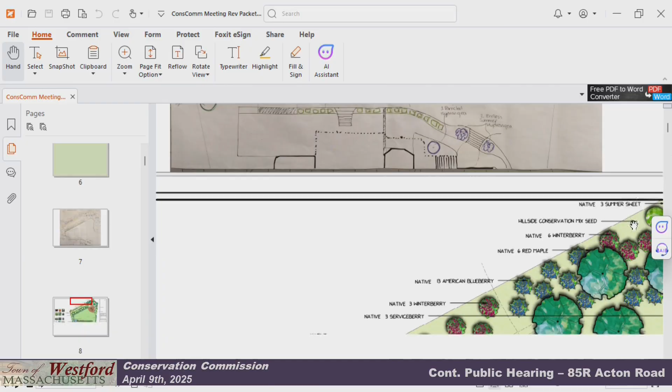Please note that these are not surveyor actual, but close approximates as measured with a grading tool used by our contractor for determining grades for building walls. Any exact measurements required by the Commission will need to be provided as part of the upcoming as-built by Hancock Associates, who we've been working closely with all along on this project.

So from a grading perspective, this augments our latest notice of intent document, which was submitted to the Commission on September 11th, 2023. The illustration depicts the notable revisions to that plan due to adjustments made in the field during construction, the resulting anticipated grade adjustments and improvements and transitions with neighboring properties. So of that, I'd like to call out just a few key things. There's a laser pointer under your map that you can use if you want to. So.

Thank you. I'll call out the first one. It has no real material impact on the grades, but we did make a revision to the small wall up here. The next item I'd like to call out are the rock and boulder walls, retainments on both sides of the large wall. So just to refresh, this is the large wall running around the back of the property, retaining for the backyard there. So there was basically retainment made on the left-hand side, and two small ones on the right-hand side. I'll start on the right-hand side.

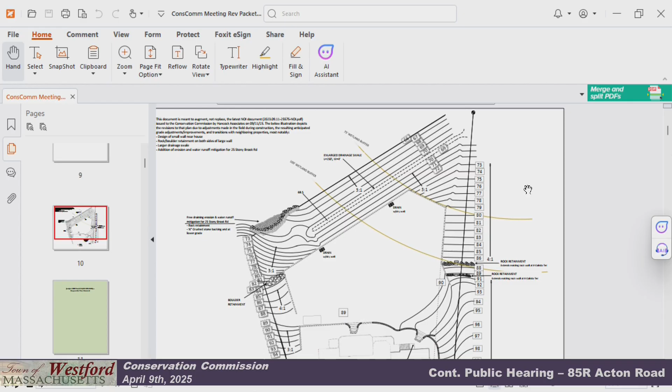So all these are done already? Yes, sir. This is after the fact, just showing us then. Yeah, we're getting close to as-built. It does not deviate so far from the original plan. I don't know if you want to try to flip them back and forth. I do have the original. I didn't include it in the meeting packet because I was afraid we were going to get too many plans and confusion.

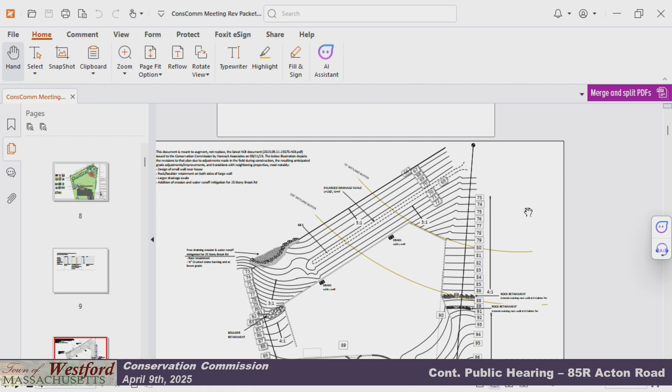But yeah, so the original plan showed 3-to-1 slopes in most places. So the improvement to 4-to-1, in my opinion, is certainly an improvement, slowing down the velocity of any precipitation towards the wetland resource area, to the top right of the plan. And when I was recently out within the last 2 weeks, the site is stable, and I think they're getting to establishing permanent ground cover, which is the next piece. I do have a printout of the original or the last NOI if anybody's interested. I know that's not as easy to display.

So what is the ground cover on these 4-to-1 slopes? It was originally proposed as the erosion control seed mix, which is just natural grasses. They reached out because the original planting plan was aggressive, and certainly the cost of all the plantings. They wanted to scale back a little bit, particularly with some of the plantings within the buffer.

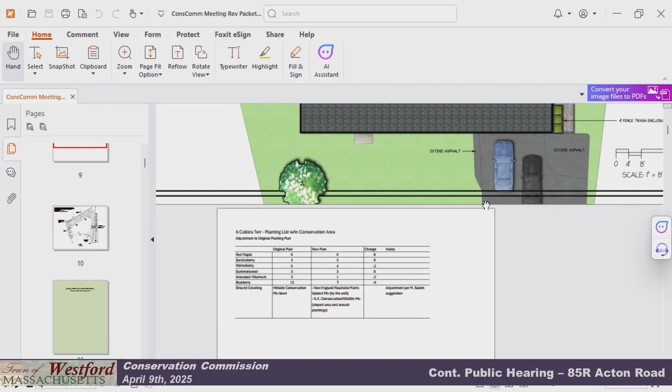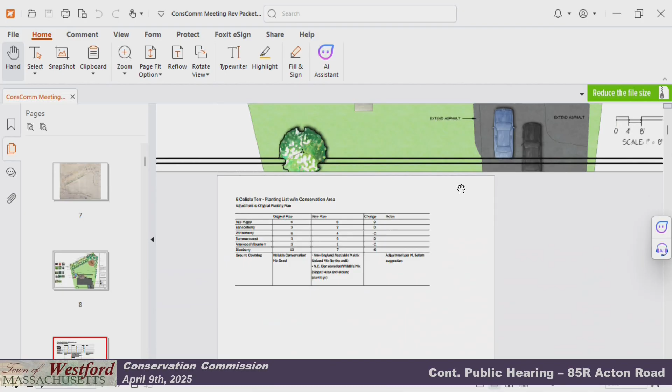So included was the original landscape architect's plan. The homeowners provided a hand-drawn, scaled back one. And then this afternoon, the adjustment from the original planting plan was documented. Within the buffer to the wetland resource, it's a reduction of 2 winterberries, 2 arrowwoods, and 6 blueberries. Sorry, I would note, one of those arrowwoods is right on the cusp. Our landscape architect was very ambitious in what he thought we could fit back there, and we walked it out several weeks ago. One arrowwood would be right on the cusp of the 100-foot buffer, so you may get only a -1 there.

In evaluating the existing conditions, as they are getting to permanent stabilization, my thought was to improve the seed mix, as opposed to just the native grasses, to both the conservation and wildlife mix, which has forbs and wildflowers, and the roadside matrix, which will introduce the more shrubby seeds, especially where the rear of the property isn't going to be maintained. The plantings are to be established and then left to naturalize, particularly within the 100-foot buffer. I thought the combination of those two seed mixes would enhance and diversify the plant community within the buffer beyond just the native grasses.

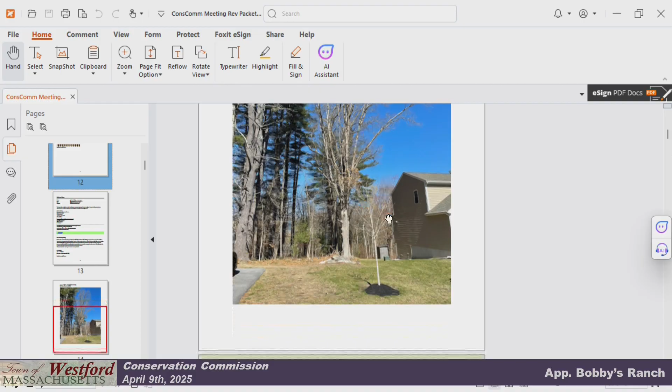The abutting property to the left, so looking at a photo that I took today, the property owner's house is on the right. There is a stone wall present that delineates the property boundary. They came in requesting permission to remove two trees. The first tree in the foreground, I think it's a maple, you can see the trunk here, is on the property owner's side of the stone wall. And so, in my opinion, that's their property, there aren't any jurisdictional wetland resource areas present, it's just two property owners.

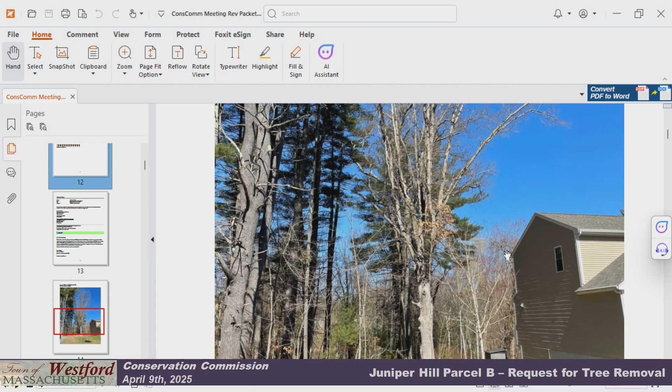In the background, probably another 30 feet or so beyond, kind of in the shadows, if I can zoom in, is another, I think, maple that is on the commission's property's side of the stone wall, but does overhang, and its canopy overhangs the property of 2 Juniper. I wasn't able to determine the status of the tree's health.

Again, they're concerned about trees and branches, and just to the left of where this photo was taken, included in the commission's last packet, a couple pines blew down in the windstorms a month ago or so. And so they were concerned about the trees and the proximity to the house. Just trimmed? I don't know. And I don't know if they've spoken with a tree company.

Typically, with trees overhanging property lines, the verticality of the property line extends up. So if they want to prune or trim the tree to the property line, I think it's within their property. Anything further than that, we would certainly need to hire an arborist, to have a professional out to assess the tree. Again, it is a hardwood, but it's sandy soils in that area, and I would defer to a professional arborist's opinion.

Yeah, I would hate to have to take it unless we really needed to, because it is a hardwood. And at least from what I'm seeing right here, while a portion of it may be crossing over the line, I don't see it hanging over the house. Right, it's certainly not going to cause damage, growing sideways. It certainly does appear to have a full crown.

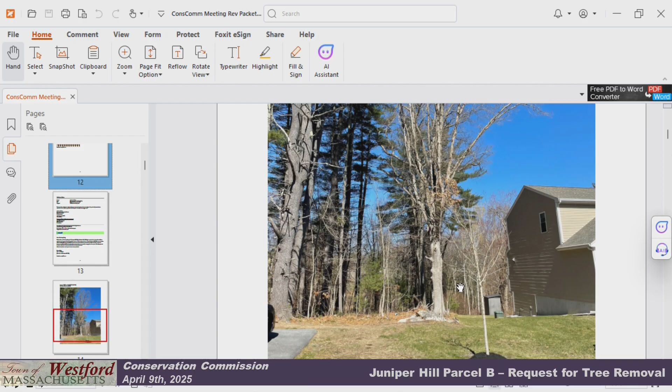And so, based off of the commission's discussion, I can progress with that. And in the event we need to have an arborist and the tree needs to be fully removed, we can. But make them aware what they can do without permission. Yes, what they can do that doesn't require the commission's approval. Yes. Okay.

Jim? This is no wetland involvement at all, it's strictly property line. It's property line, yep. There is a wetland, but it's further to the north, on the other side of the emergency access road. This wasn't part of it. Okay. Moving on to our 7:10 PM agenda item, there's a continued public hearing for 85R Acton Road.

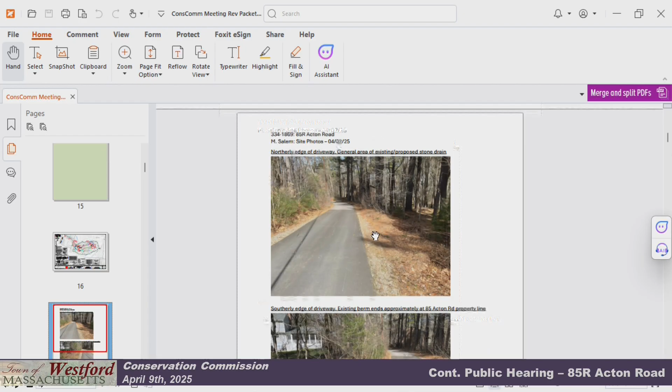If we could just paint, I have a photo showing the area. The area on the right here is the approximate location of where the stone trench would go if one was installed, and maintained as currently.

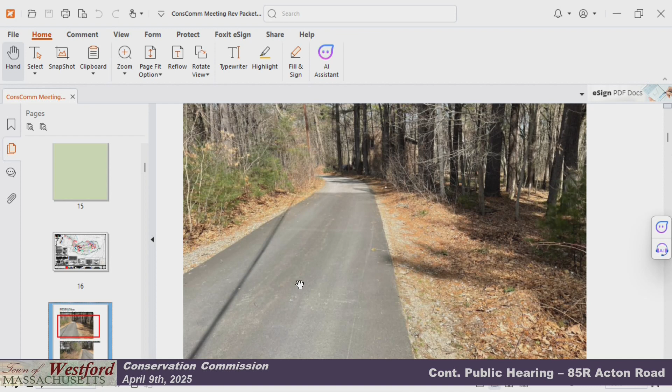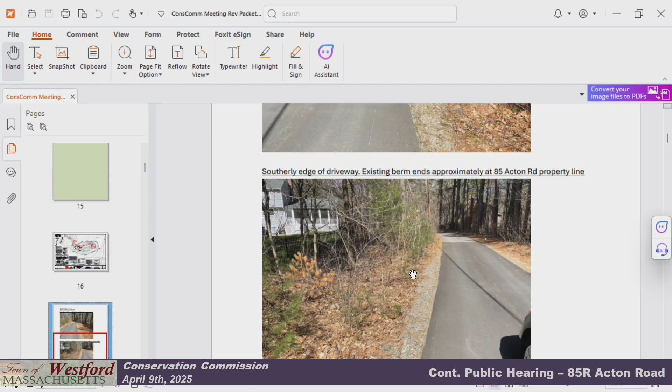Looking back up the driveway towards Acton Road, it appears that when the driveway was constructed, it was cut into the existing grade. So there's a naturally occurring berm on the north side of the driveway presently, and one also exists on the south side in this general location, continuing on through here, and there's a low point generally located at this dip in the driveway and natural existing contours.

A thought I had, and would appreciate the commission's consideration: could the natural existing berms along both sides be established, or could a natural earthen berm be established in that location to prevent issues? Basically, extend what's farther up the driveway to build up a berm so there's continued directing of the water into the pavement, so it doesn't come off onto the low point.

Something for the commission to consider - I have the photos. I'd be open to that, because I don't disagree. There's definitely a natural low spot here, so there'll be a confluence point, and it would migrate off, but we could certainly build that edge up. That's not a problem.

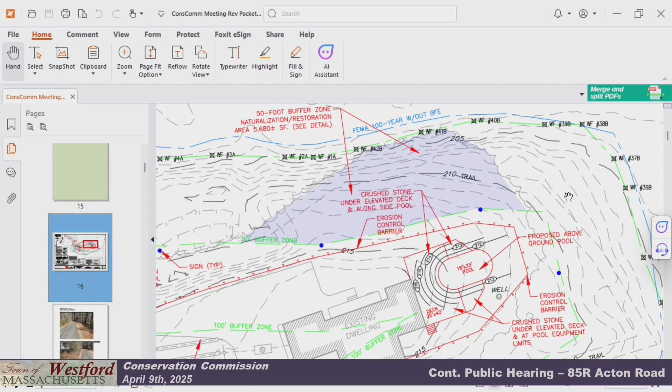Would those signposts be specifically called out in the order? Yeah, the signage isn't included on the plan, but the plan notes do say it. I can scroll to it. It's number 2: protective zone shall be identified by installing 4x4 posts with appropriate signage identifying protected wetlands are located down gradient.

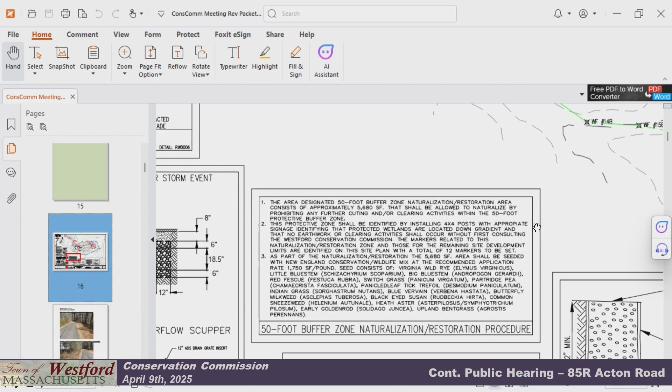Condition 53, yes, there is language for the signs: wetland resource area, do not disturb. It's pretty standard.

But I was also looking, because that condition is in perpetuity, so even when the certificate of completion is issued, that's one of the conditions that stays and would be found when somebody in the future, like a homeowner selling, goes back to the registry of deeds looking at stuff. They'll see those conditions persist.

So that really represents everything that was submitted to you to be prepared for this evening's discussion. And then, as I said, what we received was a letter from the abutter's consultant today, and I did my best to try to get that addressed and get the plan revised so we could try to be on the same page. We're not going to be on the same page with all items, but we were just trying to do our best to make it easier to hopefully close this matter out this evening.

Unfortunately, the way the consultant addressed this, they didn't put numbered items, it was more narrative form with some bullets. What I did was take the opportunity to actually number some of these, so we'd be able to come back to it if we had to at a future date. So if you'll allow me, rather than summarize their letter, I'll summarize my points, and if we could have the plan, or I can just read the points and then go to the plan. I'm not sure what's easier.

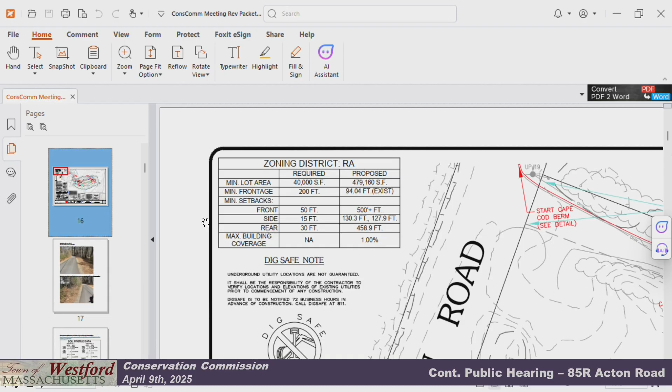So Matt, is this the area where you talked about bringing in additional earthen berm? Yeah, to recreate kind of the earthen berm that's on both the north and south of the driveways. Because in viewing it in the field and also, again, going back to the first revision, this contour, 1 foot contours, Peter? Yeah, it should be. So this is the 209 contour that shows that exact condition.

So again, my proposal, as opposed to putting a Cape Cod berm as per the common driveway plan, or as what was originally proposed, focusing the effort on this stretch between contour 211 on the south side, back up, so that there is no longer this 209 dip that does enter onto your property. And again, don't know whether that was a naturally occurring condition or if that was something that occurred when construction of the house originally did.

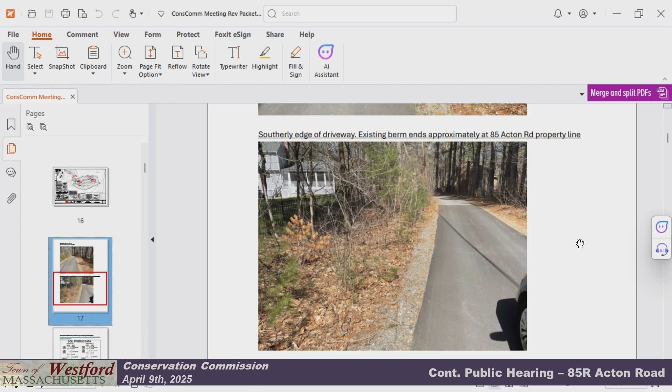But my thought, and again, back to the photos, and kind of this dip, as you've discussed, you can see the slope go down, and this is that section of elevation 210, 209, that does extend onto the back of the property at 85 Acton Road.

So my concern is, I know Mr. Timlin asked about this, and I get his point. He's worried about his septic tank. He asked about this at the last meeting. He lives at 87, that you can see off there in the top left. He's concerned that if there's too much water there, it's gonna go over onto his side and cause issues with his septic tank. I get it. But if that all of a sudden becomes a concrete barrier that goes the entire length, and I don't recall if it was that way before, that water is once again going to redirect potentially over to my side.

So I think, Matt, what you're talking about is here at the edge of the vegetation, there would be a berm. So the 209 elevation on the 85 Acton Road property, that grade there would stay, but there would be a berm raised up so that water would no longer flow in that direction. It would. So it would stay in the driveway. Yes, it would stay on the driveway and get to, again, this stone infiltration trench. And you may have to readjust the location from the original location shown here.

If I could just bring up one thing though. I'm certainly fine in doing this to protect the abutter here. I'm in 100% agreement of this. What I don't want to do though is then isolate this, because I've raised this up so whatever precipitation does fall in and does not infiltrate on its own, it will not have an outlet. So I'd be creating this captured zone. So in order to really do this, you'd be going back and filling all this in.

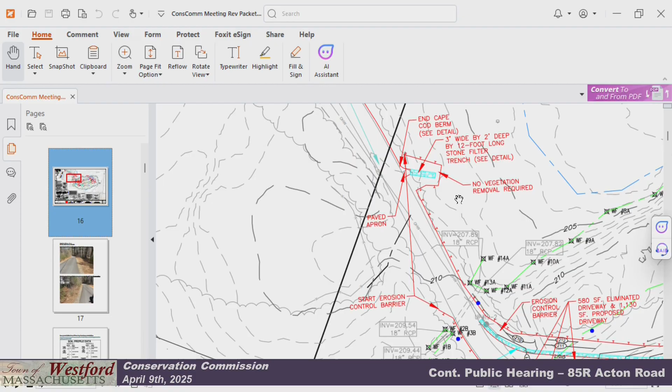So I would definitely do that, and we'll just move this down. There's no reason why it has to be here. And honestly, if we were in agreement to not do this whole berm here, I'm not even sure we really need this, because the reason for this was only because we were creating concentrated flow here.

If we're not gonna put that physical berm in along this edge and we let the water just bleed out as it naturally would off the pavement edge, because there's no evidence of it being a problem, then we wouldn't need this at all. And we could just take care of this problem here. So I'll leave that to you folks.

But to this gentleman's point, I have no problem blocking this off, but when we do so, we will put a pipe in. It doesn't have to be anything big, probably like a couple of 6-inch to 8-inch pipes, just a means for the water to exit. Just to have the ability to leave, because if surface water doesn't infiltrate, it's gotta have a place to go.

Is there a natural break that could be done for that instead? No, because if you're gonna stop the water from going this way, then you don't berm this up. You know what I mean? So we could just do the pipe here too, that would be the other option, just create a low spot here. In other words, acknowledge it's coming here, capture it here and bring it across. Well, I'll leave my engineer to get feedback on this anyways.

The other question I had was, last time, Mr. Gozo, you brought up that you wanted to see the infiltration rate on those. Not the rate, I wanted a confirmation of what they told us, that it was a 25-year storm. Okay, is this sufficient, or is there something above and beyond that you're looking for? At the top there, it's actually 50-year. I don't know if that's because the number was incorrect or because the barn was shrunk.

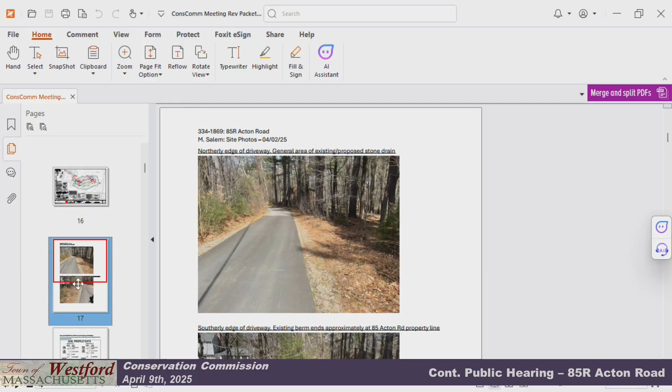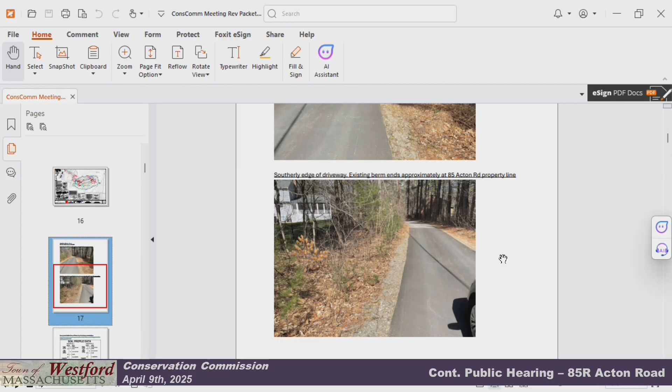Hi, my name is Kristen LeBrie, I'm from Howard Stein Hudson. Going back to the berm, the recommended pipe just creates a maintenance issue. That'll get clogged. It will end up isolating it anyway. If you can do almost like an emergency weir on a pond. Do you want to try the laser pointer? Show us what you want.

So kind of what it's at, but if you create the berm and then cut almost like an emergency weir into it, that way the water from here can escape still at that 209, because the 208 is on the other side of the driveway. Creating a natural cut, almost like what it is, but cleaning it up, creating the path across the driveway, and then shifted down here, it would make a little bit more sense based on the natural low point.

But putting a pipe there, because it's heavily wooded, it's gonna clog with leaves and just not work. Not gonna disagree. Yeah, we'll just pitch the asphalt at that level, we'll make a firm low spot. So whatever that contour is, we'll take the lowest point there and then just cut the driveway so it's lower.

It's all overhead services, so you don't have anything underground. You got a well, so you can cut the driveway, that's fine. So our other concern was not necessarily the proximity to the house, but the well is in the rear back here, so the water quality is a concern. Regarding the testing, we would like to see current testing, as if you provided for a new construction testing that was 25 years old, it wouldn't be accepted for a new build. That testing is out of date, and we'd like to see new testing for the groundwater level, as 25 years later, it may have risen up.

As for the grading, if you could kind of zoom into right in front of the garage. We do have questions regarding this grading. I know the elevation is set to 212.5, which would result in a 212.5 here. We have a 212 here that wraps outside but doesn't touch the driveway, and a 211 here. So there seems to be a grade missing in between here. The 212 would have to cross somewhere in order to get from 212.5 back down to 211,

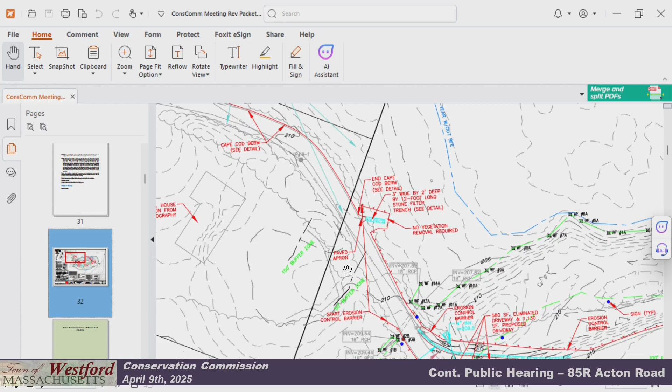So there are some revisions to the plan, specifically the removal of the Cape Cod berm, whatever the design is. We're just gonna change the grade of the driveway. Right, that's really what it comes down to, to eliminate the low spot and create a new low spot, if you will, that will then take the water to the northeast. Right, so that's kind of a change. And then the relocation or rotation, shifting of the barn.

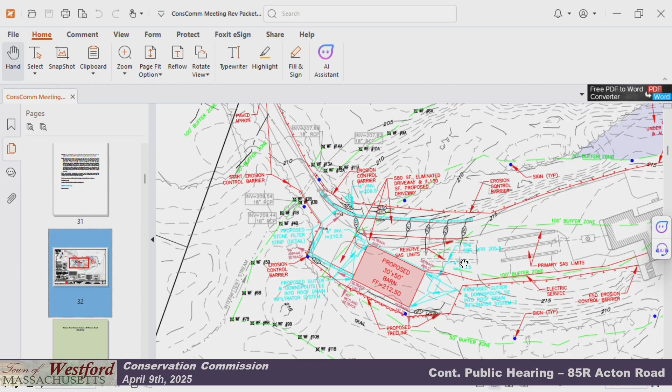I would like to verify with the Board of Health the applicant's representative's comment, just because I don't know enough about setbacks to reserve systems. If they conclude that we have to be 10 feet away, then we would have to be 10 feet away. I just don't see where they would do that because of what the regulations state. I defer to the Board of Health on those types of things. Yeah, I'm fine with getting something in writing from them. So we need to see an updated plan based on all the conversations we've had tonight.

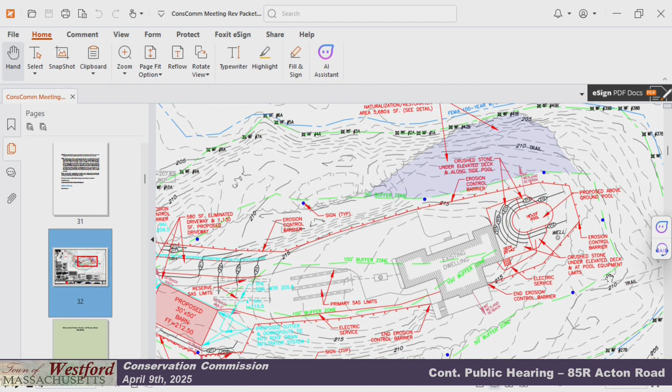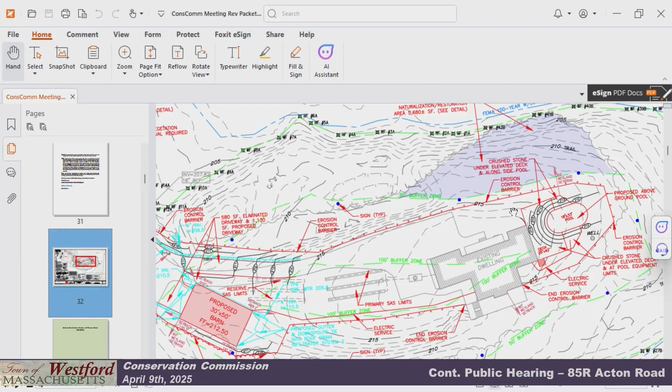Yes. And then some relocation of the signs, at the corners of the start, and then the one in between that. Right, exactly. So it looks like 3 additional signs? Yeah, or if you can reconfigure a couple so the distance is not as much, if they fall more naturally at 50 feet or something in that stretch. We'll work out something with you, that's fine. Yeah, certainly.

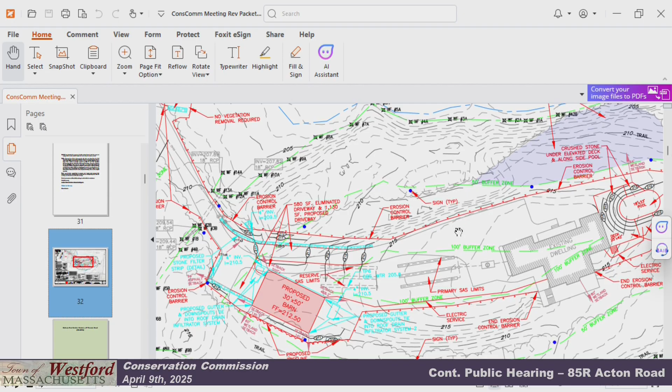And then I defer to the commission regarding the last set of comments, in terms of whether or not we'd want some HydroCAD confirmation. They did raise the point of the soil testing being from the original house. Typically, and again not apples to apples, the engineering department, when reviewing larger scale developments where access to a stormwater BMP feature would require the removal of trees, if the commission is amenable, could include a special condition that the soils be evaluated in the location of the 2 Cultec chambers as work is going on, so we're not digging new test pits just to confirm.

That would seem reasonable to me. So basically a confirmation report of the soil conditions and the groundwater level at the time that the infiltrators are installed? Or prior to work, when the barn's being built first. Right, as early on as possible, so if things need to move or we need to confer and make adjustments, the barn foundation isn't poured, but we have erosion controls in and can make those types of adjustments. That would be my recommendation specifically to that comment.

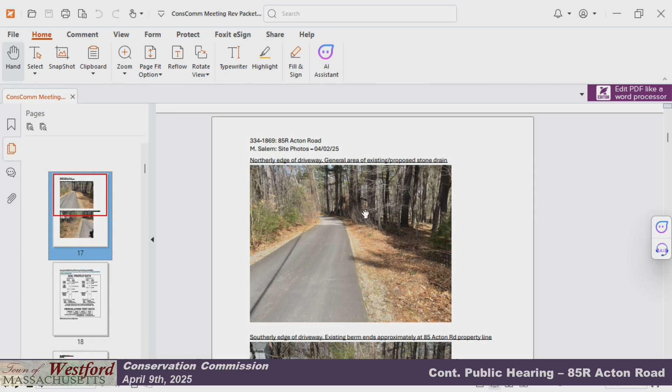But that's not what's happening in the field, Kristen. There's a natural berm there. There's a tree line. Yeah, actually, can we get the pictures on? So if the natural berm is the entire length, then I guess leave that to the northern neighbor. Zoom a little bit? The driveway's cut down. Yeah, you see kind of, again, here's kind of the grade. Get that out of the way.

So, 1 foot contours, you can't read it on a plan, I guess. In the field, I thought the existing grades of the vegetation, or the existing topography, is doing a better job than a Cape Cod berm. Because it does, and I know you talked about the 1 foot contours.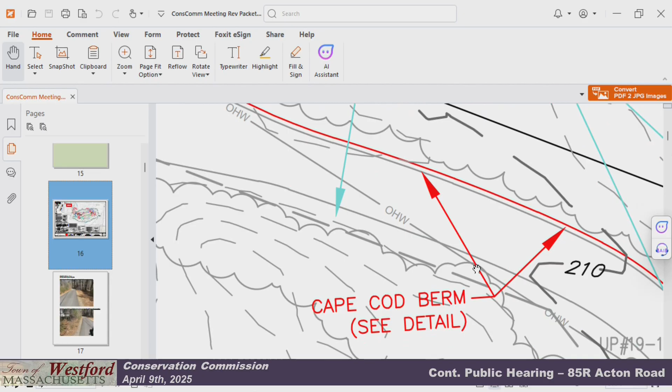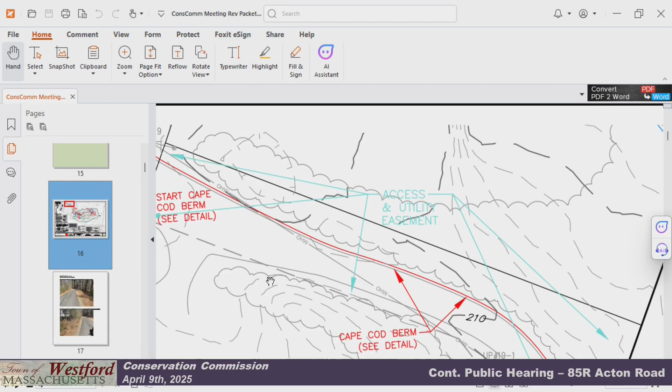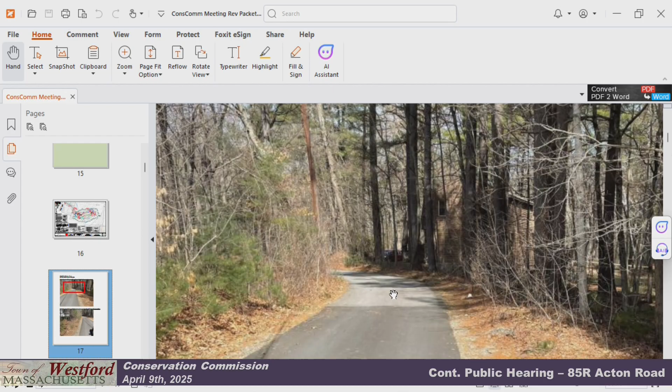So zooming into this, this is the high point of 210, and the berm does continue, it's not going directly because this is kind of the knoll that's shown. Remember, outside of work areas we're relying on LiDAR data, and that LiDAR is pretty good for what we get, but it's more regional based, not for micro analysis. So there's definitely a ridge there that you're just not going to see in the LiDAR analysis, unfortunately.

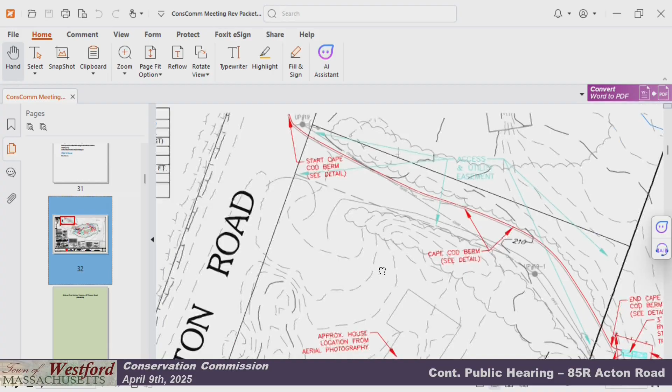The other thing to point out, if you go back to the map, what you don't see on the diagram is my driveway runs here. There is a turnaround that was designed right there, basically from an agreement when they built that easement. It's always been there since I've lived there, so that both homes can easily get out onto Acton Road facing straight.

The water tends to pool right there - sorry, I've had coffee so my hand's not that straight, but it really tends to pool there. I don't know if that changes your perspective on what you would do with that berm, or does it make sense to go on either side? But again, I wasn't the one who asked about this, it was Mr. Timlin.

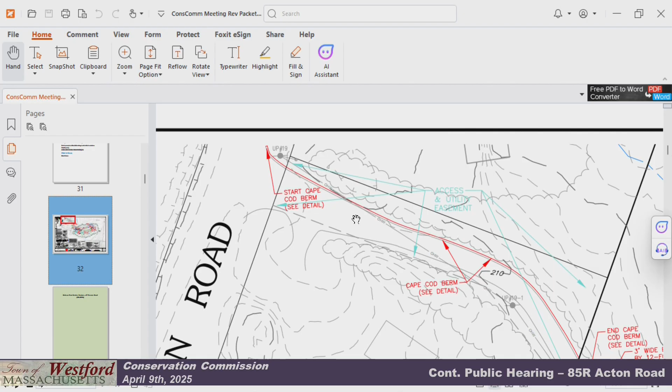Getting a bit far afield from the project site too. Yes, so about the area up near Acton Road and the nearest project - based on your original question, if there is a natural berm already there, we are comfortable with the Cape Cod berm coming out, given it does not affect things.

Well, the Cape Cod berm as I understand it is already gone, and the talk was, do we put it back? The proposed Cape Cod berm coming out - okay, sorry, yeah. If there is a natural berm along this entire section of the driveway, then we are comfortable with the commission's choice to have it removed from the plan, as long as there is a natural berm that entire course.

Based on your observation of the drainage on the existing driveway, the water is not going off in one spot, it's not scouring. The only location that I observed where there was a low point is this - that's the only place that water was going off, where water would pool and go off the driveway, affecting one of the abutting properties, not in a naturalized area.

I don't think that you need to do anything with the existing berm or whatever you want to call it on the 85 property. In 85R, there's some kind of a connection between the water and traps on the left and gets it to the right. Right, if the driveway is pitched the other way - and then that's addressed.

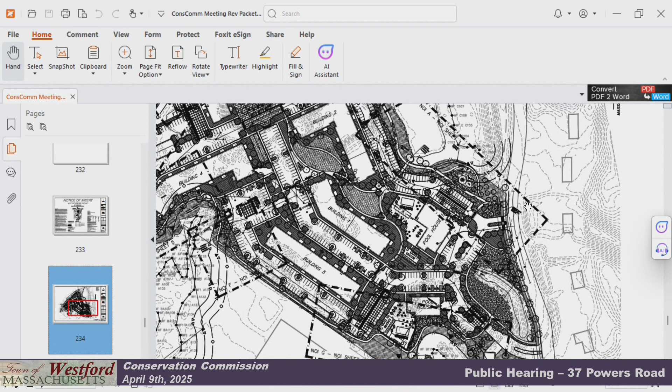There's also going to be a wastewater treatment facility on site to support the 530 units, with infrastructure located in the very central portion, not within any jurisdictional buffers. There are a number of leach fields shown on the plan, primarily in the green space, the central common area. There's going to be a small building up towards Powers Road, off the entrance, that will house the equipment for it. That will comply with state standards for wastewater, fully regulated by DEP. The design and science behind that development is ongoing right now, but that's our scheme for wastewater.

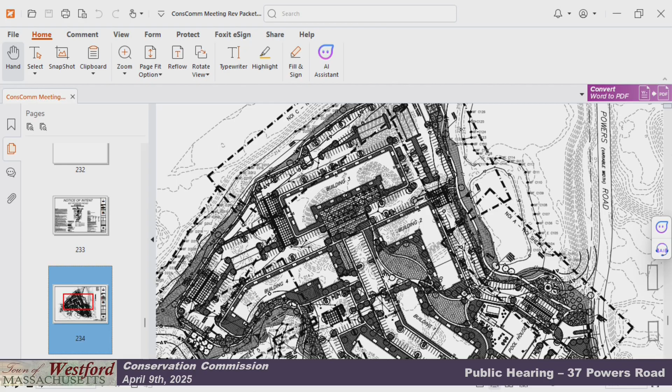For the buffer areas surrounding the site to the north, west, and south, what we've done is centralize the parking and buildings in the middle of the site, and as you work towards the edges, stop development and transition into more of a restoration and naturalization scheme. It's landscaping, but not intended to be manicured — it's intended to provide new soil that's not present there today, with seed mixes and native plantings to allow those areas to naturalize.

The caveat to that is we are proposing a public passive recreation piece to this project, revolving around a walking trail that surrounds the entire project. From Powers Road, northwest along the western property line, then towards the south, there's about 0.85 mile of walking trail. That's going to be a public amenity, part of our planning board process, and part of this project under the MBTA Communities Overlay.

Secondary to the walking trail and passive recreation, there are a couple of nature overlooks proposed. There's one nature overlook right here, overlooking the gravel pond in this area, and then to the south, another one in this corner that comes off of the walking trail. The walking trail goes around the entire perimeter of the project.

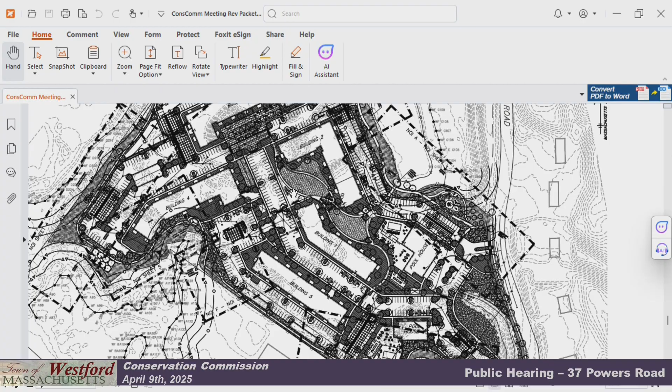The walking trail that goes from Powers Road up and along the northern side, this is actually going to be a multi-purpose path for bikers. It's going to be a little bit wider, 8 feet wide. We're proposing pervious asphalt on that, and that is going to be maintained year-round. That is the only piece that has pavement associated with it. It is pervious pavement, and it will be maintained. Essentially, that gets people from Powers up into Bell Westford and then up into 110, creating pedestrian connectivity through our site and then through adjacent sites to get up to the sidewalks on 110.

There is a small fitness area that's here, but that is... Yeah, we can go to the plans. We were just looking at the index sheet. We blew up kind of the site plan along the entire perimeter. So that multi-use path is right here. That's going to be the wider one.

This is going to be a small fitness station. This is your 50-foot buffer, 75, and then 100. So we're outside of that 50, but still inside jurisdictional. This is the nature overlook that I had mentioned earlier. That is within the 50. If you look at this small section here, part of the trail does cross into that.

I'll let Dave dive into the vegetation piece of this. But basically, to summarize, we're centering our development to be outside of jurisdictional areas as much as possible. We're then transitioning into a restoration and naturalization plan that has a passive recreation component to it. Dave, do you want to start talking about the restoration a little bit, what the seed mixes are, the different tiers that we have, which are all represented by the hatching on the plan?

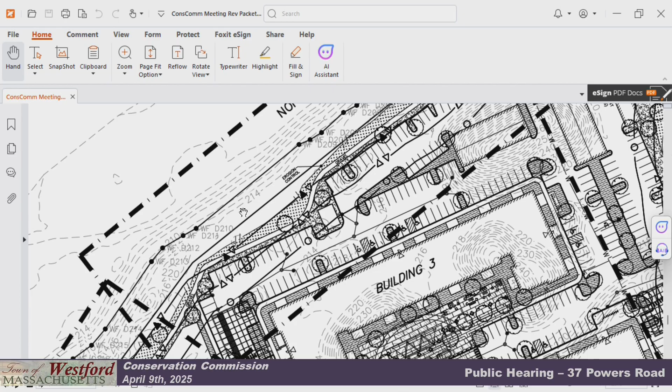Where we're working in the 50-foot and the 75-foot, there is an earthen berm at the edge of the gravel pit where they got to their property bound, which is full of, I don't want to say garbage, but it's all sort of mixed aggregate material that they've pushed over to one side. And the vegetation that is there is really ruderal, non-native, either invasive species or noxious weeds and non-desirable species.

So in that area, we have the ability to clear that vegetation out and remove some of the soil, because as you implied, this rhizomatous growth via root structure is prolific in Phragmites and some of these other species you mentioned, as well as seed stock. So we would be able to grade down, remove some of the soil structure, apply clean, organic, rich screened loam, and then apply the native seed mix blends and have a native planting schedule on top of it.

One other question. So there's going to be a lot of heavy equipment here, right? There is right now. Could it be stored outside the boundary? We wouldn't have an issue with that as a condition, because there's enough land area here outside of buffer that we could store those overnight, certainly.

I assume this is over an acre of land, and this will be subject to NPDES general permit. Sure. So for over an acre of land, any of these properties will have a stormwater pollution prevention plan. It will be subject to coverage under the NPDES construction general permit, which has provisions for monitoring erosion and sediment controls, stockpiling of material, parking of vehicles where you might have fuel leaks, and finding designated areas to keep them away from natural resource areas like wetlands. And the swimming pool, is that in the buffer zone?

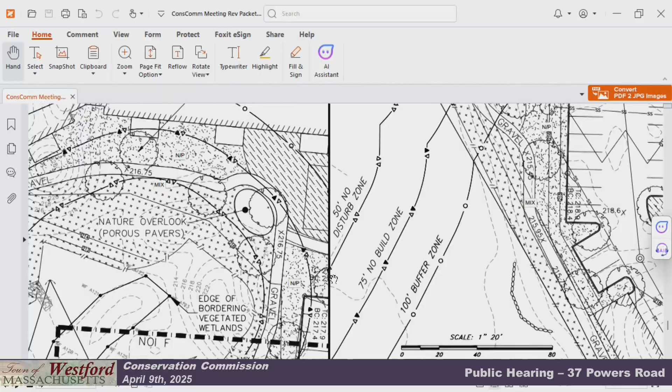So yes, we have two recreation areas, or two amenity houses. This first pool house is not within buffer zone, but if you look at the secondary, this is the 100-foot buffer right here, and the edge of the patio comes up to the 75. This pool? That rectangle is the pool, you can see the little pool chairs. So we've got the edge of the amenity space here, this is the 75-foot buffer, this is the 100-foot buffer, so we are nicking it a little bit.

Well, the concern is about chemicals. Discharge. Chemicals and stuff, where you store them has to be outside the buffer. Yeah, I don't think that would be an issue. Okay.

And discharge too, I mean, discharge, that's some kind of design pattern, whatever you guys do, right? Yeah, it would be depending on the type of pool that goes in there, but certainly that could be a condition, that they don't discharge. I mean, we could discharge into our stormwater system, which would adequately treat it.

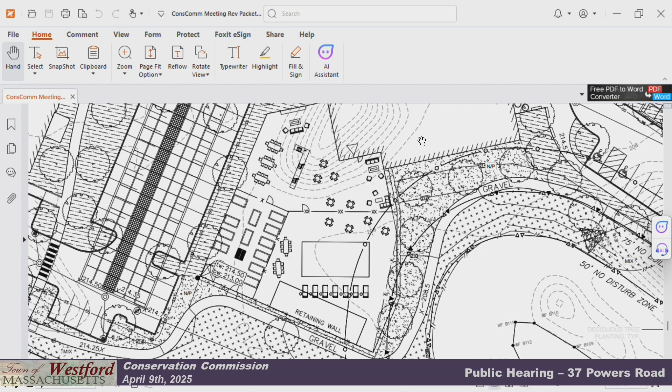So with this, where the hatching is the X's, that's the area to be maintained annually or mowed annually? So this is the restoration mix, this is the naturalized mix. Dave, would we be mowing this annually or letting that go, and then this would be mowed annually? Well, where I'm going with my question is when the erosion controls come out, right, if the X areas are going to be mowed annually, what provides the guidance for the maintenance crew to know where they stop mowing?

Got it. Oh, so at the edge of, okay, yep, understood. Yeah, because the erosion control is great during construction. When it goes away, no, you're right. So let us put a little bit of thought into that. It's a good question. Posts or monuments, yeah, that's exactly what I'm thinking. And those actually might be a nice opportunity for a little informational placard as well, if they're by some unique vegetation. I jump at those opportunities.

I talk about restoration ecology because it's the thing I'm most passionate about. I didn't get my degrees in ecology to watch trees get knocked down, which is nice about a site like this because there are no trees to knock down. It's already flat earth. However, I take pride in this. And any opportunity to educate the public, whether it be before or after photographs in a placard that demonstrates this was in fact a gravel pit, and here, through tireless efforts, we've tried to make it this way. Please be kind to it. Things of that nature, yeah.

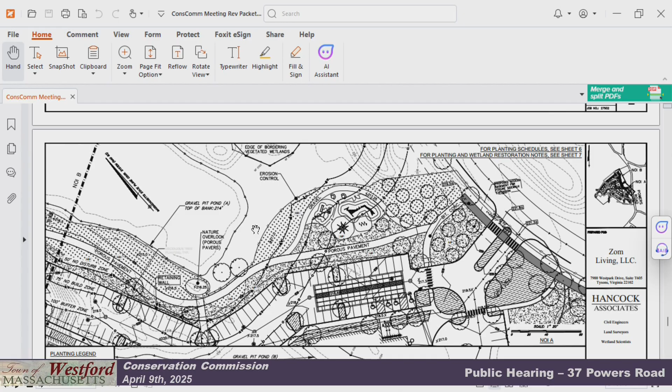Matt, can you, so when I was looking at the nature overlook there, right by that gravel pond, that looks like it's about 10 feet off the top of bank. Normally, if somebody was putting a residence near a pond, we wouldn't let them build a little patio area that goes to the resource area. I like the idea of natural overlooks, but our practice is we don't let people build an area that they could kind of sit there that close. Okay? And I'm assuming the commission would like to go on a site walk out here?

Yeah. Is that fair? So what we can do is we can certainly make that a topic of discussion as we walk around the specific area. To one, just look at the existing conditions and how it would be sited, should it be allowed in this location. And two, identify alternative locations for it. Something that we can still kind of get that view of the natural resource but further away, essentially. Right.

And one of the other points on the overlooks is, we understand that the Conservation Commission has standards, and how do you face the single-family homeowner who you just said no to and said, why did you let the development happen where we tend to prohibit those things? Again, I think in the context of just how degraded it is and how much work we're doing, with a site that will have usage of people in 350 units, these overlooks give people a designated spot to go and look. If you don't have those amenities available, that's when you tend to see illicit paths, where somebody cuts a path at the easiest point.

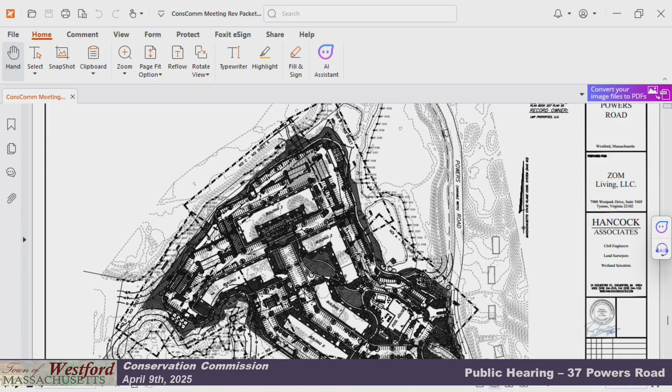My only comment was, you mentioned water connection to the Bell Westford to the north. Is that shown on the plan, or as that gets further developed, can that be? Yep, so it is shown on the plan, it's just tough to see, it's on the index sheet. If you zoom out a little bit, I'll show you. It comes in the main entrance, which is right here, comes down the main corridor, comes up. Oh, that's the W, water, okay, I thought that was the line of.

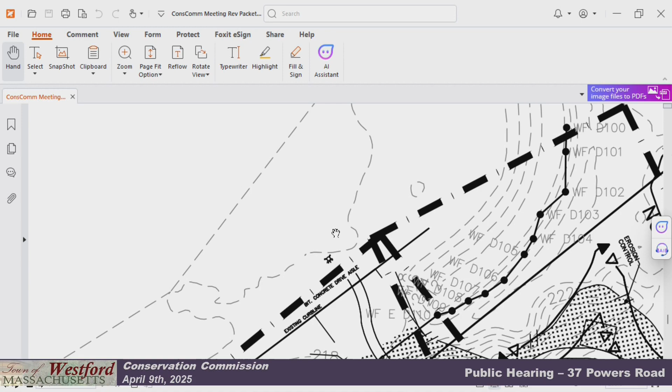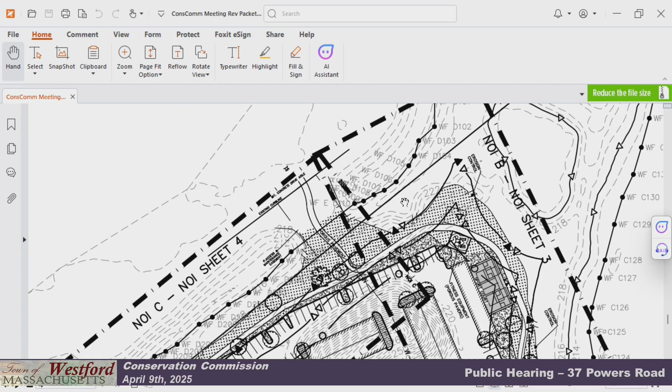Yeah, and then that's where the existing hydrant is for the drive aisle on Bell West. We're gonna end up connecting somewhere right in here. I don't know exactly where. The applicant has had discussions with the owners of Bell Westford, and they're supportive of that. The water department's obviously very supportive because it's a big connection. Yeah, I just missed it on all the dotted lines, thought it was just a plan sheet. It just happens to coincide with the thin line and the W line, yeah.

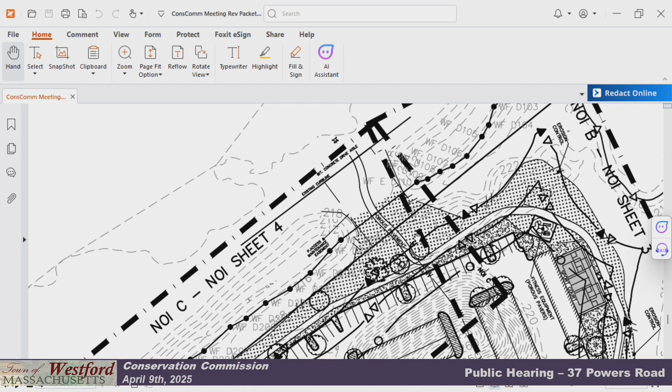So, if it's there, I don't know if it's addressed in a construction detail, again, kind of crossing the T's, having that included where it connects to the existing. Yeah, so this section right here, there's a culvert in that intermittent stream, and we're trying to coincide everything with that existing connection. It's public water, right? It is public water, yeah. Right now Bell Westford's a dead end, it's just a loop to themselves off of 110, and what we're proposing is to connect everything together.

Any comments or questions from members of the audience? If you'd like to come up and tell us who you are and what your question or comment is. I've never done this before, and I'm an engineer, and I know it's late. So I'm Barb Cornelia, I live in Vinebrook Estates, which is right off of Powers Road here. You kept mentioning the Bell Apartments, there's 420 apartments in that complex, and now there's gonna be 530 in yours. That's quite a lot of apartments in a very small area, right?

And so the water is an issue in that we are on town water in our neighborhood. So is this water supply cutting into the town water gonna affect all the houses and neighborhoods? Like water pressure? Water pressure, yeah. Will it affect our water pressure? Does the water department currently have capacity to accommodate this development? Yep, through the chair, we've had those conversations with the water department. They've identified a study that must happen. Tighe and Bond is the independent water consultant for the department. We funded that study and it's currently underway. They do not anticipate water supply issues, but they're modeling everything.

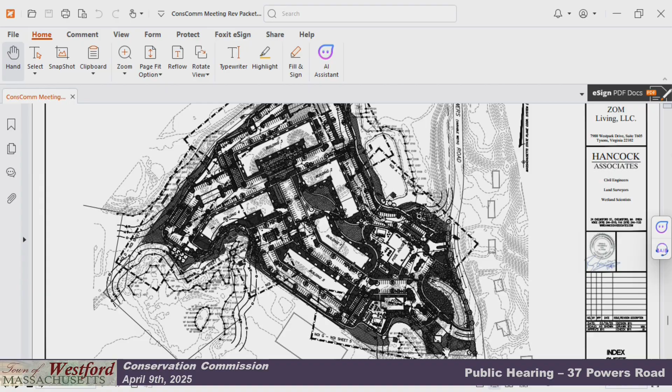So where's the leaching field to the privately owned wastewater treatment plant? Which one? There's a number of different fields being proposed right now. Where's the plant, first of all? So if you could shift to, is this the index sheet? Yes. Zoom out a little bit so we can get an overall view. So right now, this is gonna be the pump house. We have a tank field in this area. This is where all your primary treatment's gonna be.

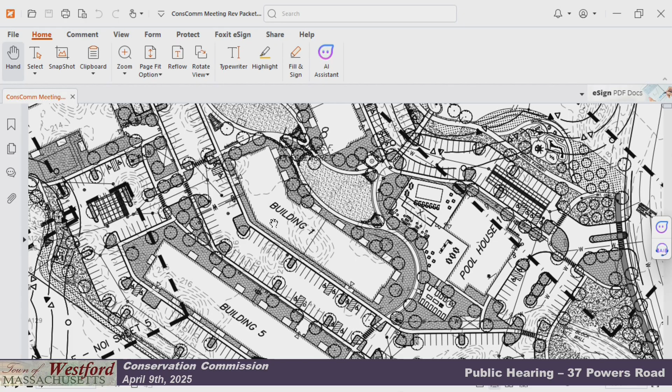And then up in the central corridor, coming down this way, there will be leach fields under the drive. Sorry, we could scan up. So they start right about here. They're right in this area, and then they're across the common in the green space here. So some more easily accessed than others. It's fun.

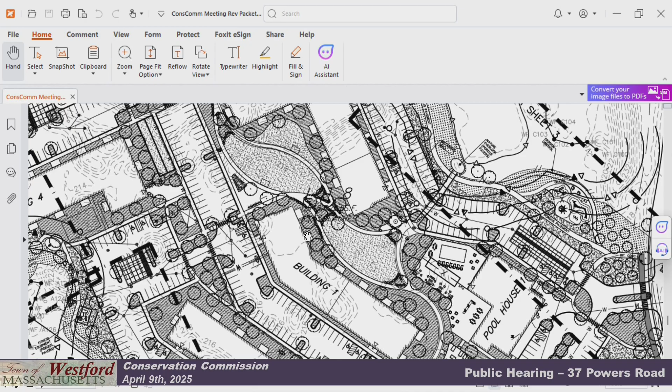That's all I have. So when are they gonna do a site visit? When would you like to? Would it make sense for us to do it with the planning board? We haven't discussed. Like a joint site visit? Or would we rather just have our own so we can wander where we want? Given the size of the site, we might be interested in two different things, so we might wanna do it independently. Yes, given how large the site is. Okay. And we just need to have it coordinated, given the health and safety factors, so that we can notify them of the time and date we'll be there. Exactly. And escort you around.

You know, sometimes we've had other sites where it's like, oh, I'll get out there when I can swing by or take a look. I don't know if you wanna float a couple of dates, or I can coordinate through Matt. Yeah, that usually works. Matt knows what we can do. And plus, we're getting more to the evenings where daylight's our friend. It's getting better. Yeah, I think on the ground with plans in hand, it will speak volumes to get out there. When are you continued with the planning board to? May 5th. Makes sense to go after.

So I would like to continue to have a number of discussions here with the commission, even if we are continued with the planning board. I know this was our introductory night. If we could continue for 2 weeks, we can schedule the site walk, if we can do it within that 2 weeks before the next hearing. We can discuss what we saw and keep moving towards the goal. So you want to meet in 2 weeks again, with some answers to our questions? I have a few questions here that I can answer, and the goal will be to conduct a site walk between now and 2 weeks, so that we could also review the site visit.

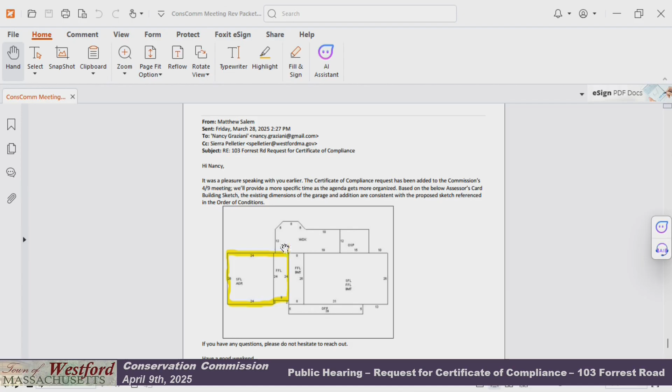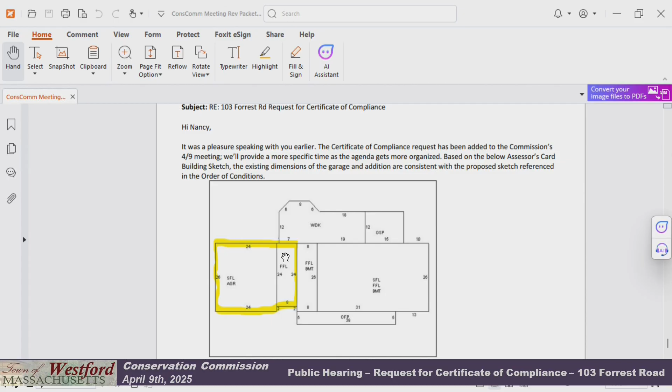In looking at the assessor's card sketch, the proposed addition and garage are consistent with the 32 by 26 garage addition and entryway that was on the site sketch.

In reviewing the site, there is an additional wood deck that has appeared over the years. I'm working with the property owner to seek after-the-fact approval, which will be coming back at a later date. Again, the scope of the order of conditions was construction of a garage and an addition to the previously existing house.

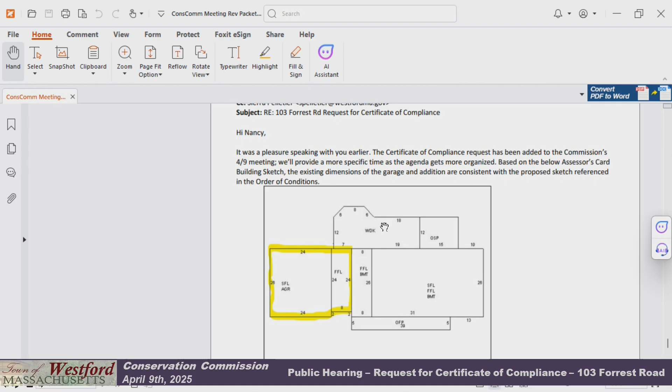I would recommend issuing the certificate of compliance, as the work was done in substantial conformance. I'll make a motion to that effect. Second. All those in favor? Aye.

For the garage? Oh, no, I was ready to get out some pictures, not that I have any, but I felt like... Oh, we gotta talk about the deck next.

Oh, I do want to tell you something about my little vernal pool, after hearing you guys discussing educational information at these new places. As a science teacher... Spring peepers already? Oh, I can't open my windows in the evenings, it's so loud.

I would go down for my students and get buckets of water and bring them to Lowell and deliver them to the different science teachers so we could all look at the life and times of Westford vernal pools. The kids loved it, loved it—the microscopes, like 'look at this, I got this.' It was amazing. So last year was the last year I was able to do that, because I'm tired.

So you're off to a new place. Yes, which I don't know of. That's the first thing everybody asks me—so where are you going? Really, don't know. Anywhere but Westford? No, I don't know. Wait two years, there's 530 apartments coming up.

That is a lot, jeez. And I'm sure the planning board with the traffic is gonna be—that's gonna be something, like Cornerstone Square. It's gonna be crazy. I don't like driving into that.